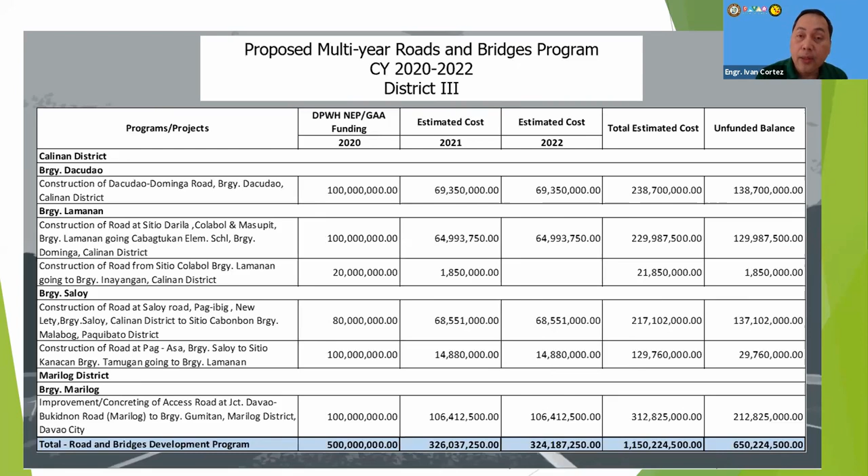We get grants from national government agencies, and shown on screen is a sample of multi-year coordinative funding engagement with DPWH for our roads and bridges program. The one on screen is for District 3, totaling over 1.1 billion pesos, mostly found in the barangays of Calinan and Marilog District, Lamanan also, and Saloy.

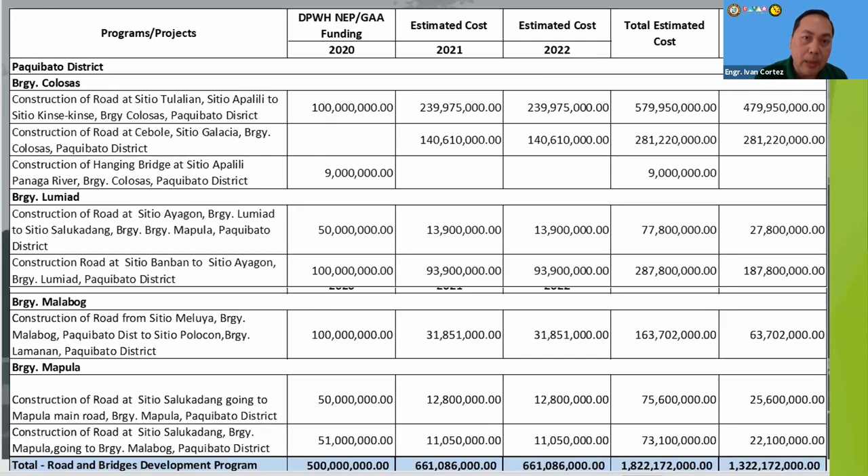For District 2, these are some of the projects also under the multi-year roads and bridges program. So if you're looking at the screen, you will find that 2020 was already taken up with DPWH under the GAA, or General Appropriations Act, and NEP. And if you're also wondering how we prioritize projects, these documents are the sources of projects. We have mandated plans.

Mandated plans for other initiatives include studies conducted with JICA and other agencies such as ADB. For the mandated projects, we have the Comprehensive Development Plan, updated for 2019 to 2022, and the Comprehensive Land Use Plan for 2014 to 2022. The proposed amendments for 2021 to 2028 are now scheduled for second reading at the City Council, so we're waiting for their advice on when that will be. We've conducted a series of committee hearings on the amendments to the CLUP, the Land Use Plan, or the Zoning Ordinance, since October last year.

Up to this year, we have the Executive Legislative Agenda. This is when newly elected councilors convene with the mayor and vice mayor to plot the priority projects for the city. The executive legislative agenda is also part of the listing of projects, where we take a look at how to prioritize those listed.

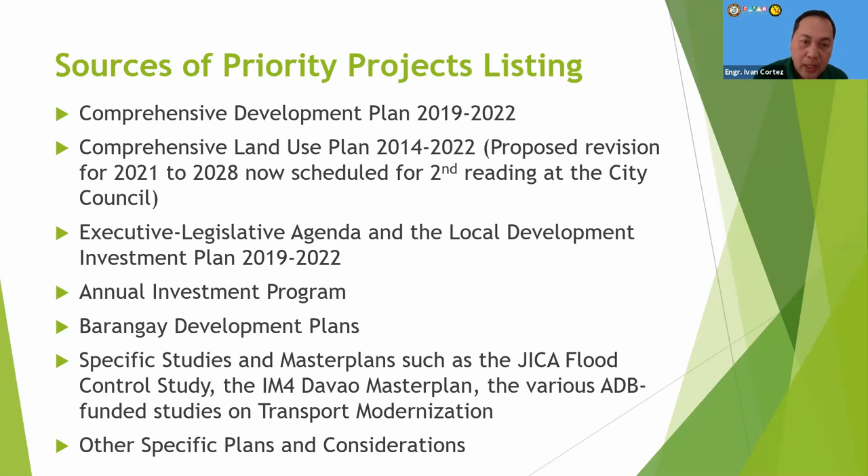We also have the Annual Investment Program, the barangay development plans, and specific studies and master plans such as the JICA flood control study, the IM4Davao or Infrastructure Modernization for Davao project, and ADB-funded studies on transport modernization. For other specific plans and considerations, we have the road network development roadmap, traffic management plan, mobility plan, urban services development plan, economy and industry concerns, and social and environmental considerations.

Some of these plans are also incorporated into our comprehensive development plan.

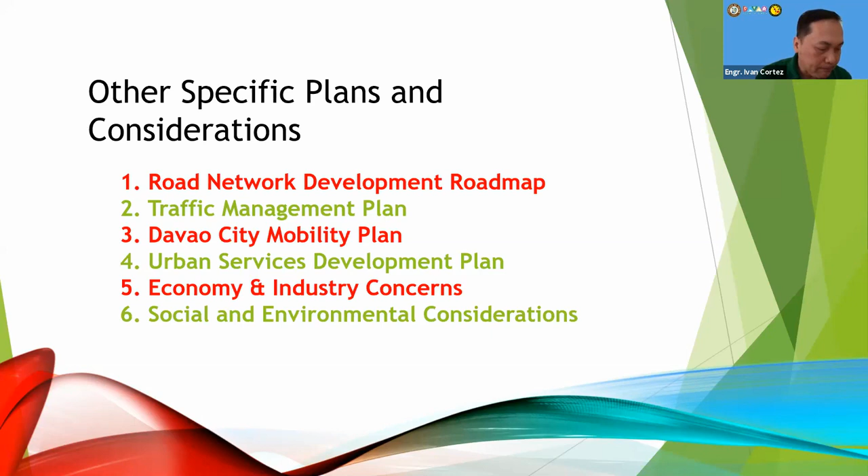On screen are some of the projects being undertaken by the national government for the benefit of the people of Davao. I will not expound on them as they will be presented by the concerned agencies. These are the Coastal Road Bypass Construction Project and the most famous Samal Island-Davao City Connector Bridge.

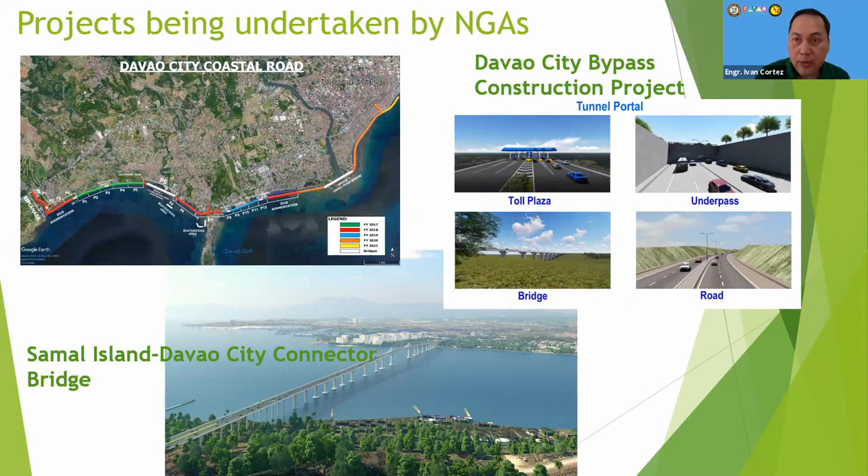Also in the pipeline is the Davao City Expressway project. This has three sections: the Ma-a interchange, the Panacan interchange, and the interchange that will connect Ma-a to Dumoy.

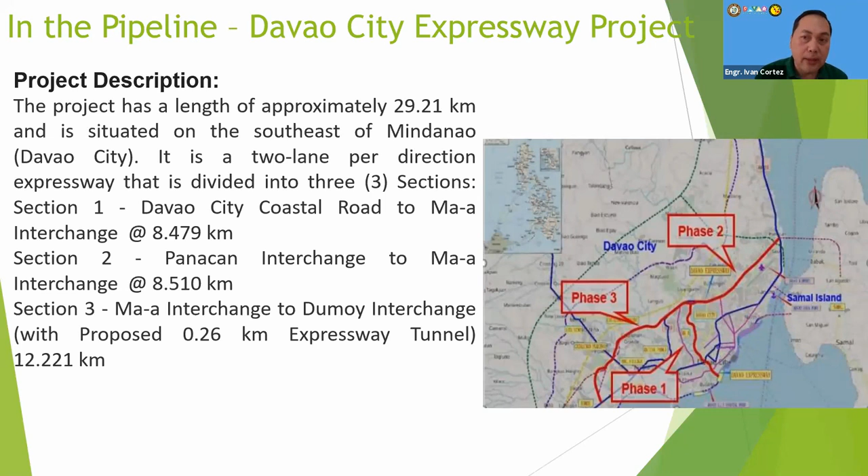Our guiding plan for infrastructure projects is the IM4Davao, as mentioned earlier. This study provided a listing of infrastructure projects which Davao City may implement for completion up to 2045. It recommended improvements in the road network, mobility, traffic, and urban services development.

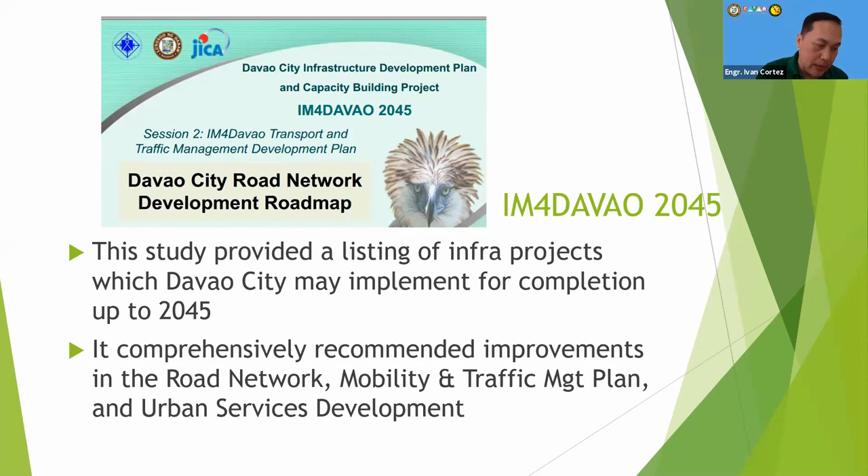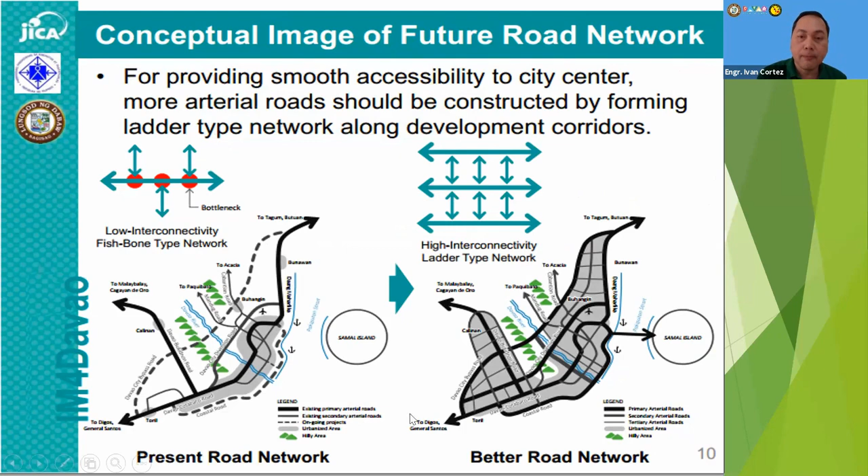To give you a glimpse of what's inside the IM4Davao, on screen is the conceptual image of our future road network. You'll find on the left side of the screen the present road network, and we're planning to have a better road network with parallel roads. One of those is the bypass construction project, along with lateral roads crossing each other.

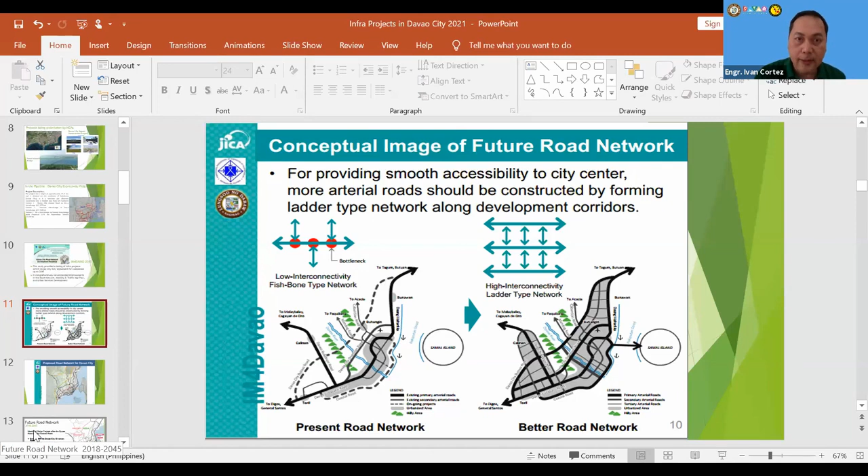Our road network will ensure connectivity, redundancy, and accessibility are enhanced for better productivity and efficiency.

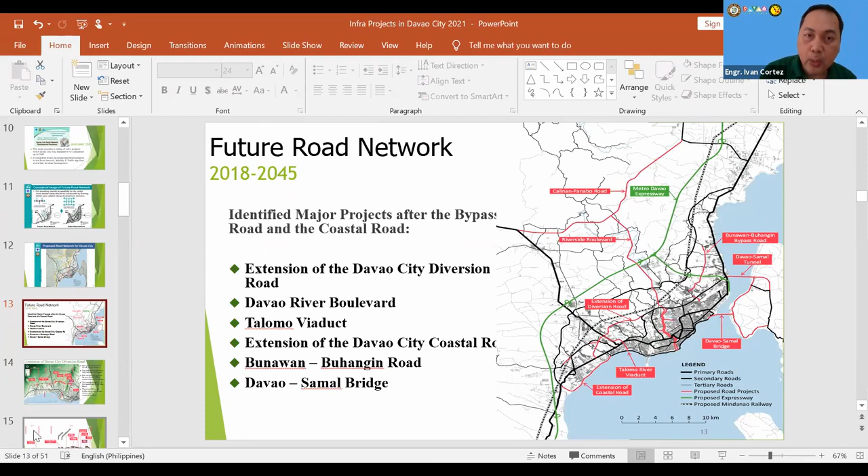Some of the major projects identified in the IM4 are the following: the extension of the Davao City Diversion Road, the Davao River Boulevard, the Talomo Viaduct, the extension of the Davao City Coastal Road, the Bunawan-Buhangin Road, and the Samal Bridge. These are all included in the 2018 to 2045 IM4Davao study.

This is an illustration of the extension of the Davao City Diversion Road. As you can see, if you're using the Davao Diversion Road, you'll still have to pass through Bangkal — that's where the choke point comes in. To solve that problem, you won't have to go all the way down from the diversion to Bangkal just to meet the traffic there. This is the solution provided in that study.

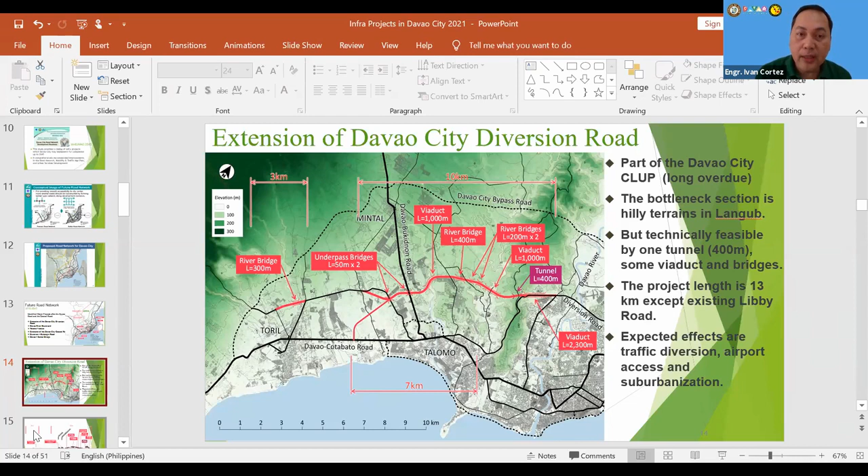In that study, you'll find an illustration of the bridges needed to connect all these road projects and provide the extension for the Davao Diversion Road. This will also require a tunnel, a 400-meter tunnel.

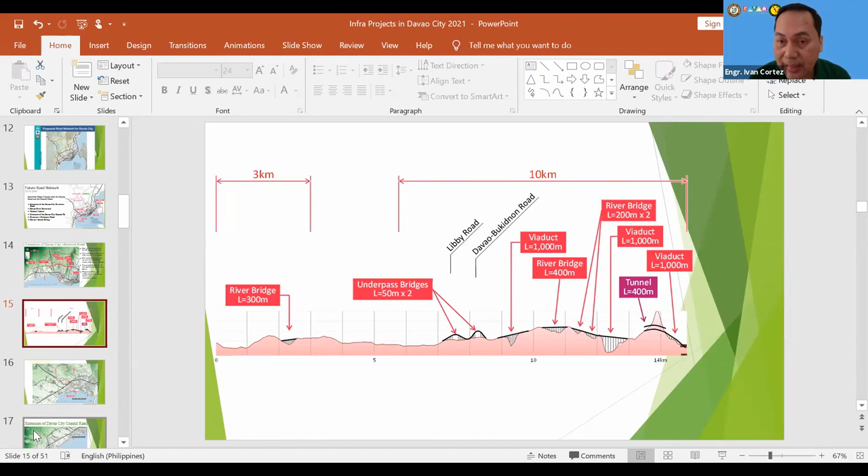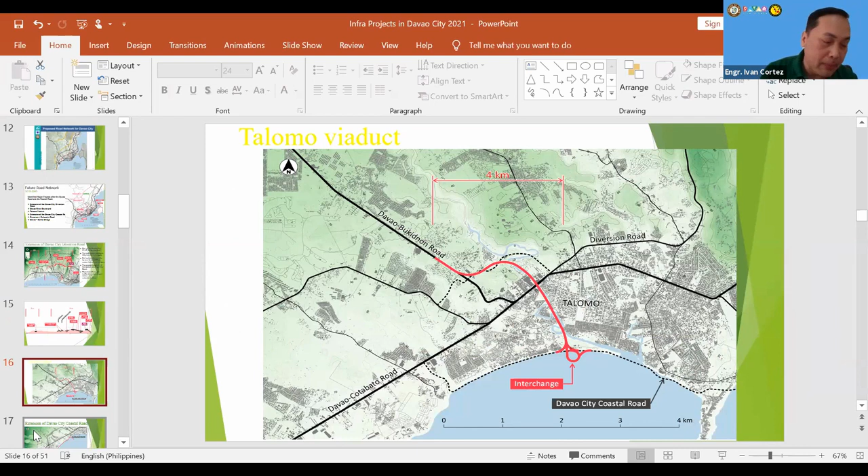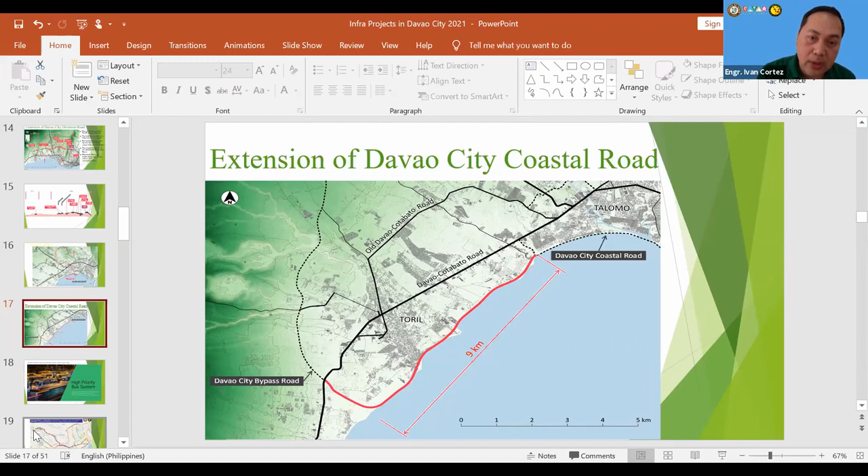The Talomo Viaduct is seen to decongest the Davao, Bukidnon, Ulas intersection. This is also in the pipeline already. And then the extension of the Davao City Coastal Road is also in the pipeline. This will connect the coastal road to the bypass road. The extension is in red line, and the dotted line is the Davao City bypass road. So from Bago Gallera all the way to the Toril coast, and then all the way to the bypass road.

We are in the thick of things in finalizing the land acquisition activities of bus depots, bus terminals, and bus stops for a high priority bus system, which will have 1,000 buses replacing the 7,000 plus PUJs in the city. This is in coordination with the Department of Transportation, who are funding the project.

In preparation for the HPBS, or the High Priority Bus System, the City Government of Davao is already implementing the DIBS, or the Davao Interim Bus Service. In the first quarter of 2021, we have already provided bus services for Catalunan Grande and the Diversion Road route, and the mayor launched these routes just recently.

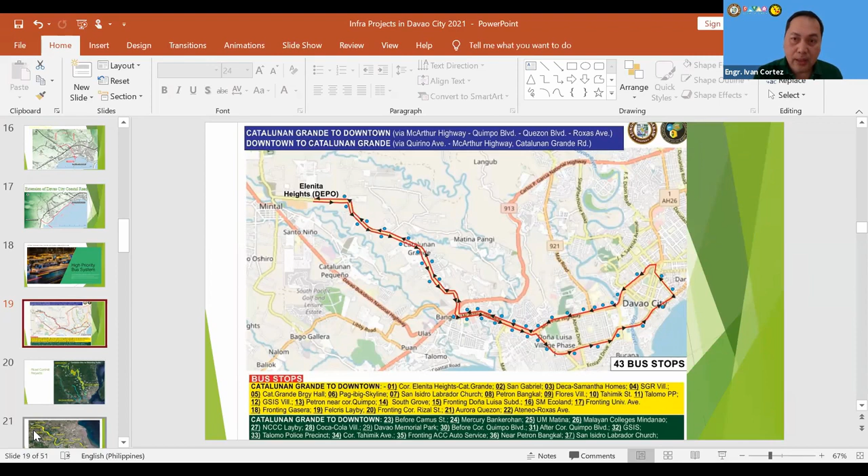We also continue to address flooding concerns. The biggest flood control project that we will schedule for implementation is contained in the IM4 Davao study, which the study also was taken up after. JICA also commissioned another group of consultants to take up the flood control and riverine projects, involving Davao River, Talomo, and Matina River. In that study report of JICA, they have already suggested the strategies as well as the listing of projects that must be undertaken in order to address the flooding concerns in the downtown area.

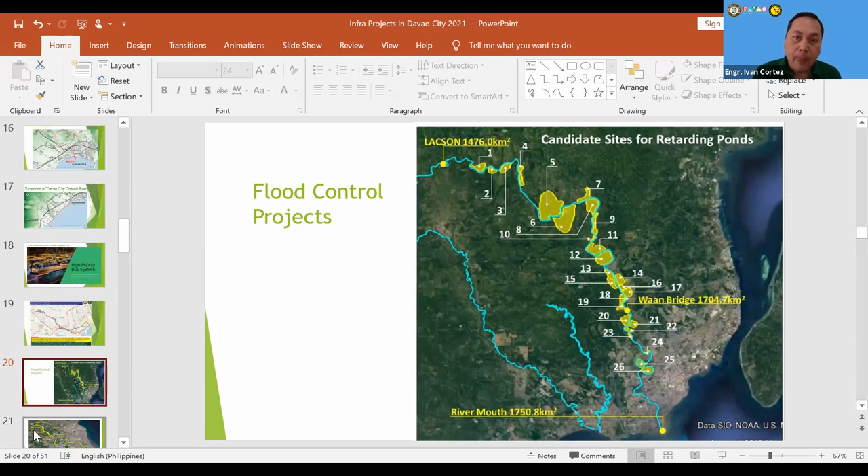Another illustration on screen as a result of the study is the widening and cut-off of the Davao River. The actual size of the Davao River is illustrated on screen by the green line, that snake-like pattern. You will see the yellow line indicating the proposed river flood control project, which will cut off two bends of the river along Maa, instead of continuing with the snake-like pattern. They will somehow straighten the river, and the spaces that will be provided by those cut-off lines of the river will be utilized for the relocation of those that will be affected by the project.

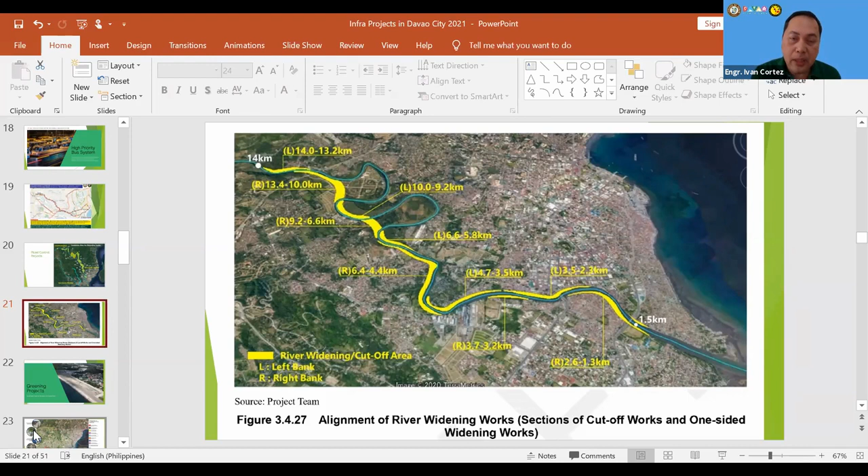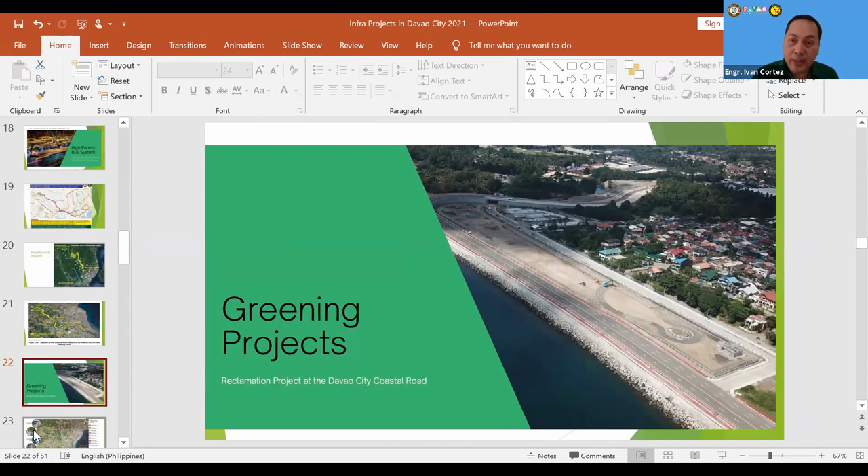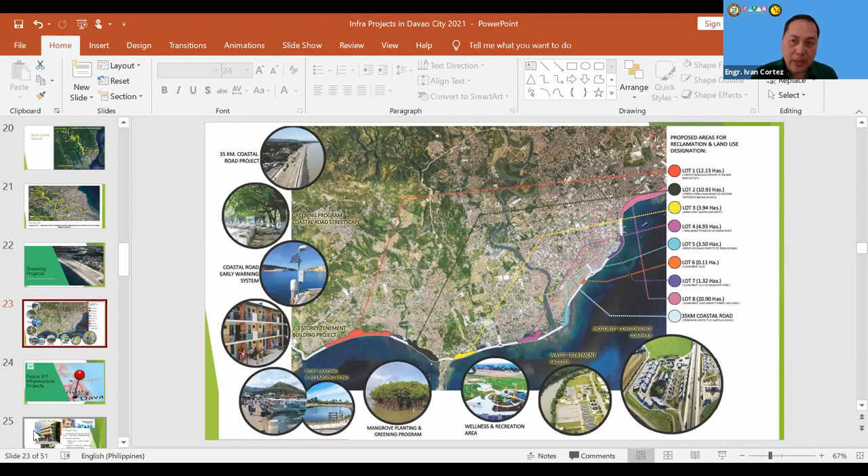So again, the spaces that will be created because of the reclamation project, which is the coastal road, our technical people at the city have come up with this scheme for those spaces, which might include tenement housing, early warning device system, wellness and recreation area, wastewater treatment facility, and underground flood control projects, because basically the coastal road created a fence, no, and obstructed somehow the flow of storm water from draining to the sea. But overall, the areas will be largely for greening purposes, as instructed by the mayor. So those areas that were created by the coastal road will really be largely for greening purposes.

Earlier, you've also seen multi-million road projects for the rural areas in districts 2 and 3, for Marilog and Paquibato, but be informed that we have the Peace 911 infrastructure projects. This will allow our fellow Davaoenos in these areas better access to services and facilities, as well as improve their living conditions. When we ask them what infra projects they need, on top of the list are roads, water system, buildings for health centers and schools.

If you will notice, these are areas which are not yet being served by the Davao City Water District. So when these barangays were given the 20 million funding from the national government through ELCAC, the local communist armed conflict project, most of the projects submitted were on roads and water system, as well as school buildings and health centers.

Talking about buildings as part of the infrastructure menu of projects, allow me to show you some of the buildings being constructed in the city, which are aimed to pave the way for better public services.

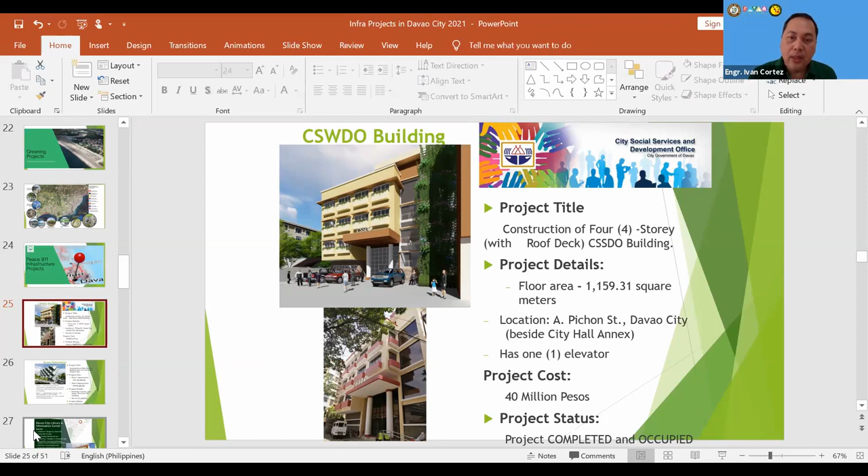On screen is the CSWDO, or the City Social Services and Development Office Building. This project is already inaugurated. They had a blessing here. It is a 40 million project.

And then you have the Museo Dabawenyo. The library project for Davao is a 4-story project wherein the higher you go up in that space, the more quiet it gets.

I'm talking about the library. For the first floor, you can have group discussions. For the second floor, you have the learning amphitheater. Third floor, you have the formal reading area where it's really very quiet. And for the fourth floor, you have the administrative area and the AVR.

Let me go back to the museo. Museo is a 195 million project, and this will be managed by the national government once open. So this will become part of the itinerary of every Davao visitor once completed.

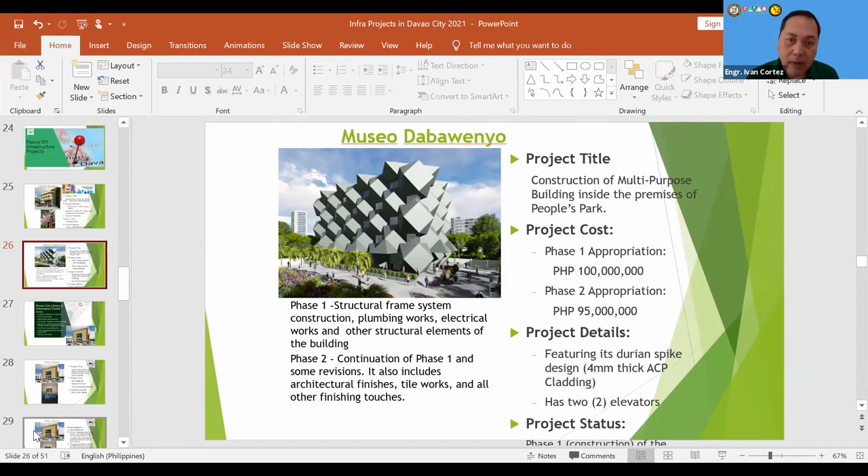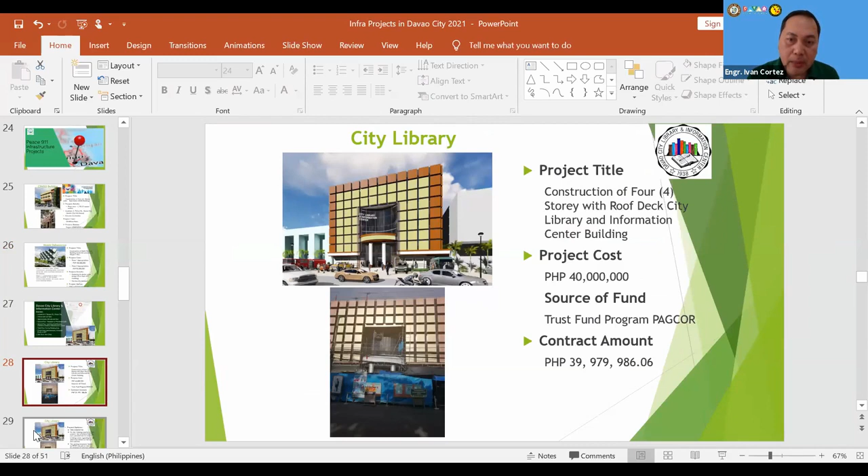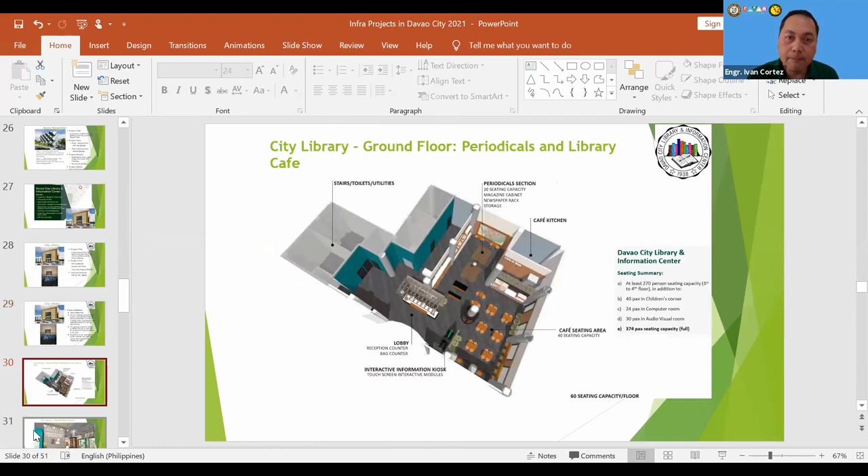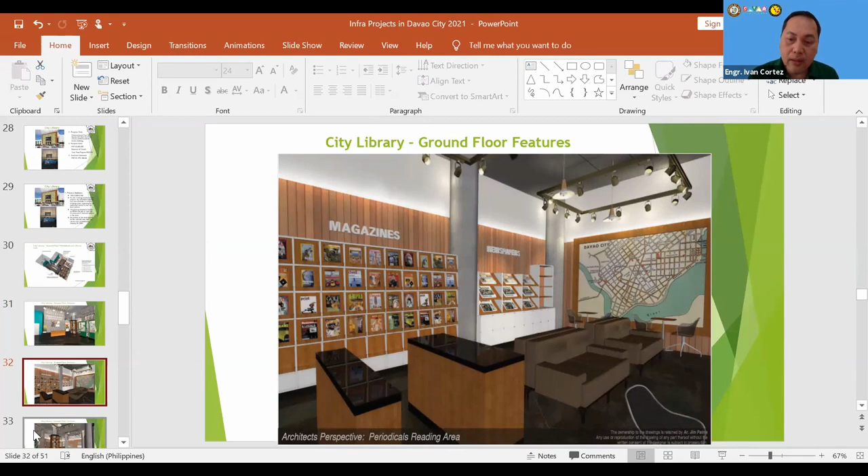Okay, City Library again, 40 million, but the contract amount was 39.9. It's 100% completed in terms of the library structure, but we're still dealing with issues on ISF in the parking area. These are what's inside the City Library. If there was no pandemic, we would have already opened this to the public on a 24-hour basis, so people can have a place where they can do their research and other academic pursuits.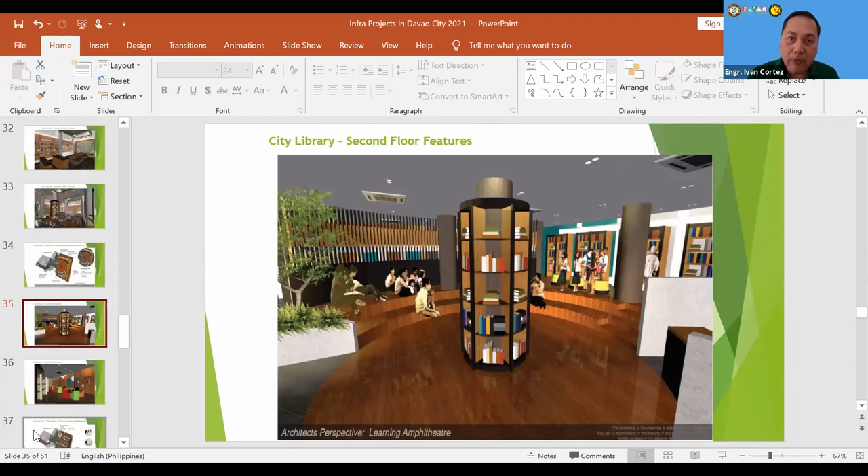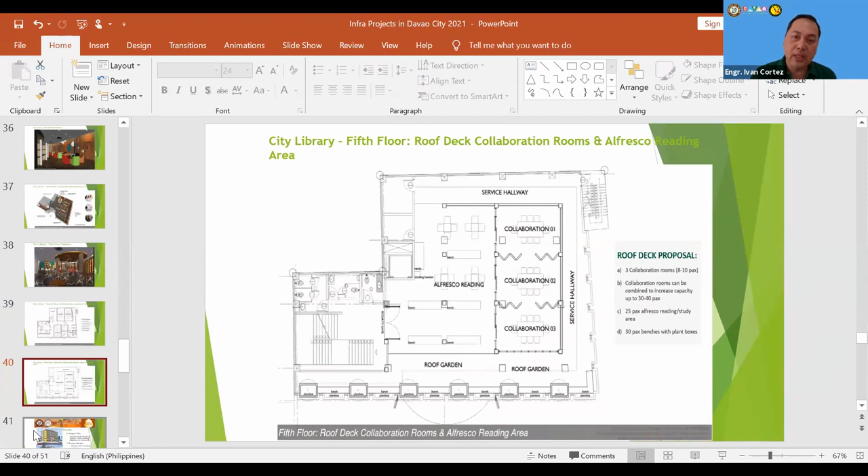Ground floor, that's the second floor of the area. Second floor features, and we have the third floor. This is how it will look like. Fourth floor, administrative building. Fifth floor is the roof deck. These are some of the suggestions for the utilization of the area.

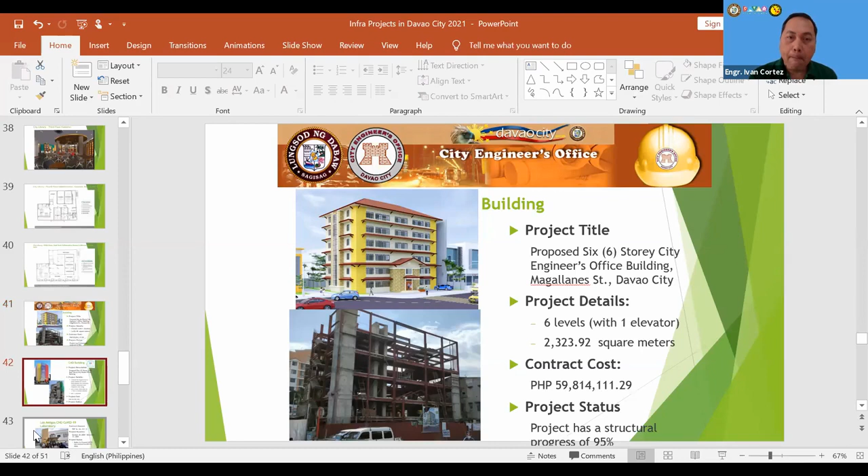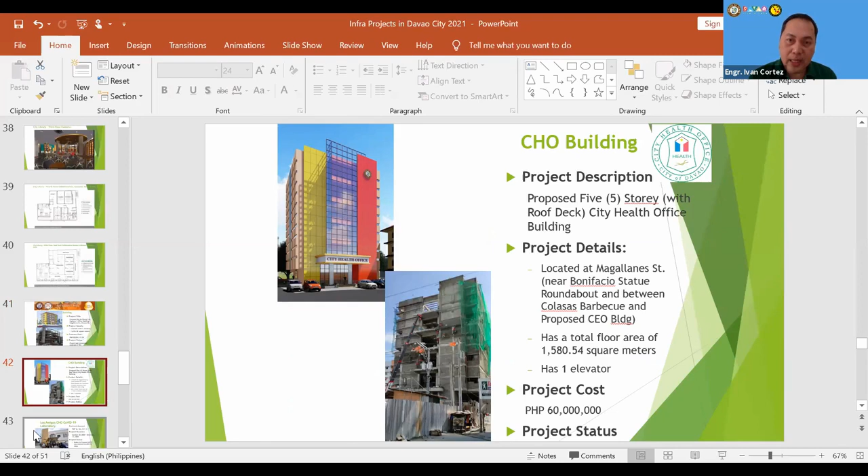Another building is the City Engineer's Office. The contract cost is 60 million, but there's an additional allocation of 80, so it's already about 140 million. And then you have the City Health Office building at 60 million pesos. You will find this near the Bonifacio Monument. This City Health Office building is just beside the earlier shown City Engineer's Office, so they're adjacent to each other.

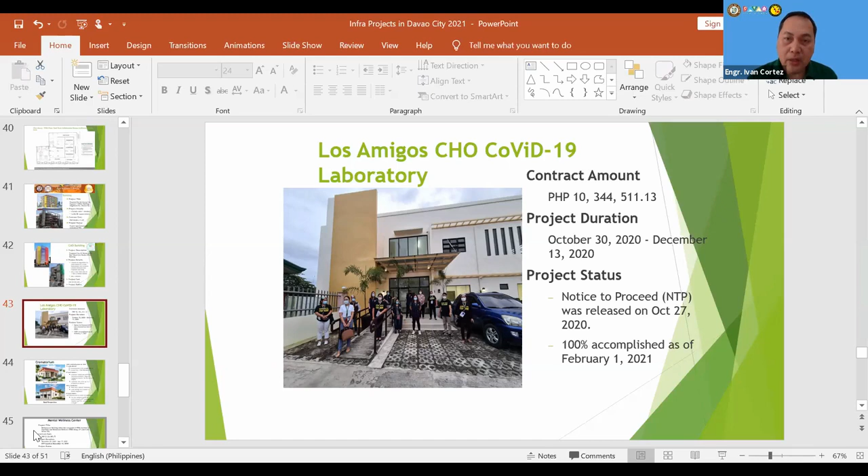We have just completed the Los Amigos CHO COVID-19 laboratory, a project cost of 10,344,000. And then the crematorium, this is also operational already. We have the mental wellness center, where the notice to proceed was issued last December. The project is ongoing and has a progress of 1% as of January 2021.

And then the Davao City Special Needs Intervention Center, project cost of 4.5 million, is in ALS People's Park, Pelayo corner Palma Gil Street.

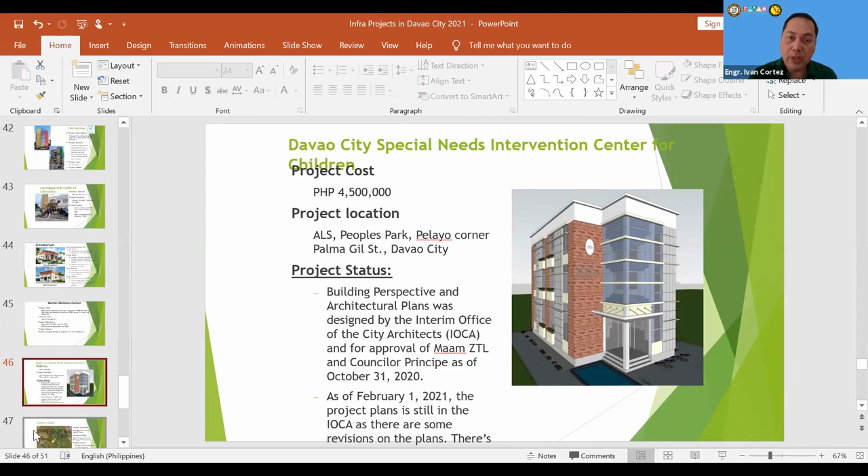On the landfill, we need to have another landfill in the city, and we're targeting the areas beside the current one to serve the purpose. Instead of scattering landfills all over the city, we decided it's wise to have the next landfill near the current one, so we won't scatter the not-so-pleasant amenities of a landfill.

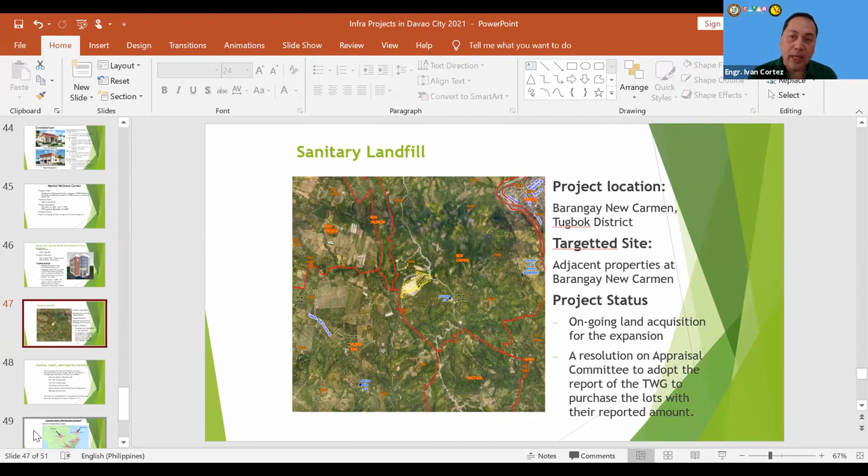Also in our plan and pipeline are the Central, South, and Mid-East bus terminals. We're correcting the notion that Bunawan is the north of Davao, because if you look closely at the entire map of Davao City, Bunawan is really in the Mid-East portion. If you're referring to the northern part of Davao, you're referring to Marilog and Paquibato, with Marilog in the northwest and Paquibato in the northeast of Davao City.

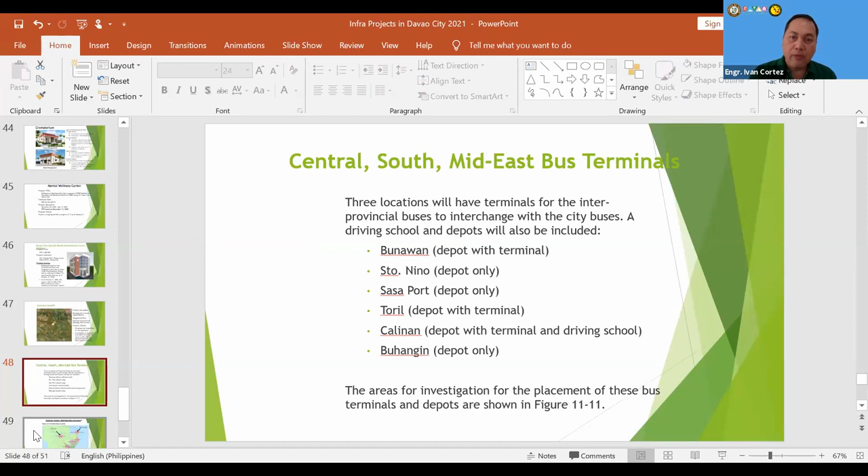So we'll have terminals for provincial buses: the central one near Calinan, south near Toril, and mid-east bus terminal near Bunawan. We've already scouted areas where these terminals will be located. These are the areas being considered for the 3 provincial bus terminals for Davao City.

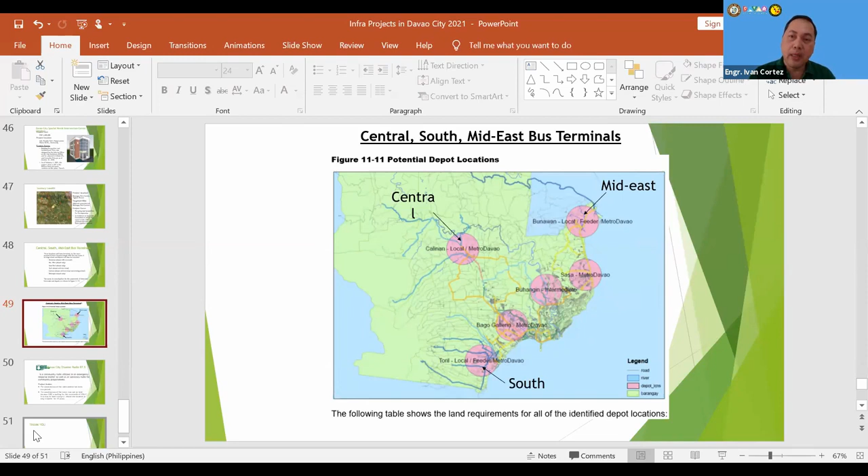The idea there, as I mentioned earlier about the HPBS, is that once commuters reach the provincial terminal, they will switch buses from provincial to HPBS in those provincial terminals that will be established in the city.

I'm mentioning the city disaster radio, not purposely to encourage you to listen to it just because the mayor is always on this channel, 87.5 FM, but also because this relates to my infrastructure topic—we're already allocating funds to construct a city tower for radio, so we can have our own tower for this disaster radio. Thank you very much.

I'm cutting this presentation short. I'll be very glad to join the open forum later.

Thank you very much. Wait, thank you, engineer. You know, the Davaoeños are thanking the heavens that professionally you have migrated from sexuality and family planning to city planning. So we hope you can join us in the open forum as you promised.

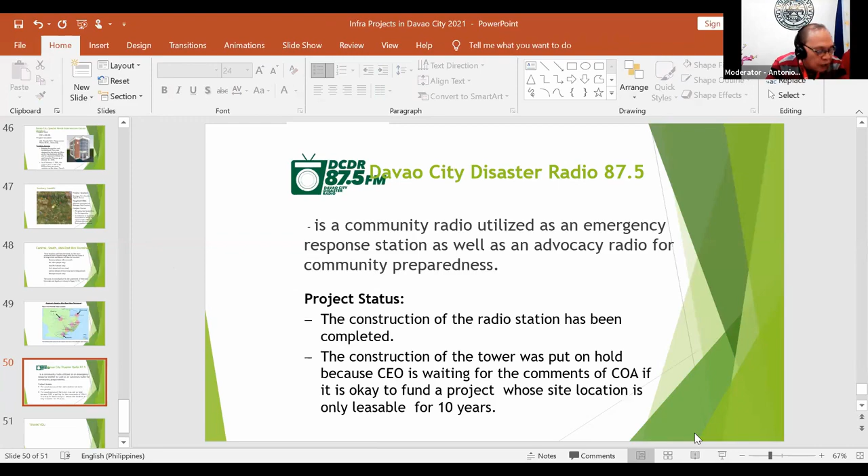Robert Mugabe, the witty Prime Minister of Zimbabwe, has advice for everyone using a towel in the bathroom. He says, treat every part of your towel nicely, because that part that you wipe your butt today will wipe your face tomorrow.

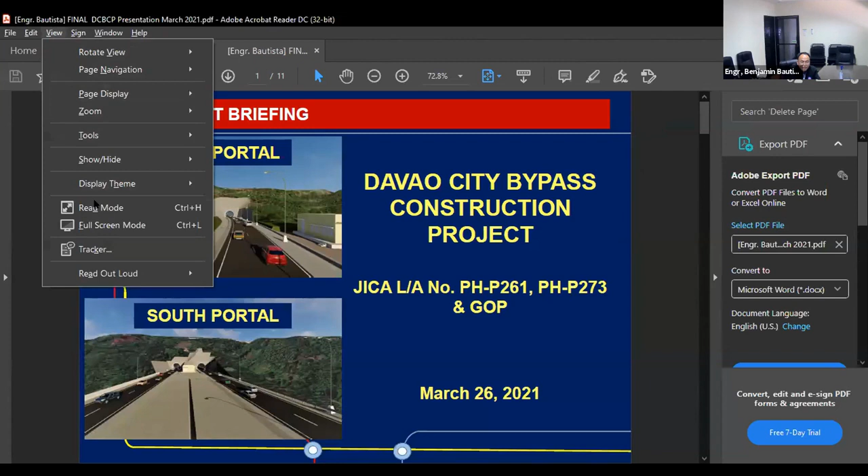Next slide, please. This Davao City Bypass Construction Project starts from the Davao-Digos section of the Pan-Philippine Highway, Barangay Sirawan, south of Toril, Davao City, approximately 500 meters south of Lipadas Bridge. It will proceed in a northeast-west direction towards Barangay Marapangi and Bato, where it will shift slightly northwest upon crossing the Lipadas River.

This is the Davao-Bukidnon Road. It will cross the Talomo River and then proceed in a northwesterly direction towards agricultural land in Barangay Matina, Biao, crossing another waterway, the Matina River, before it proceeds to the tunnel section in Barangay Magtuod.

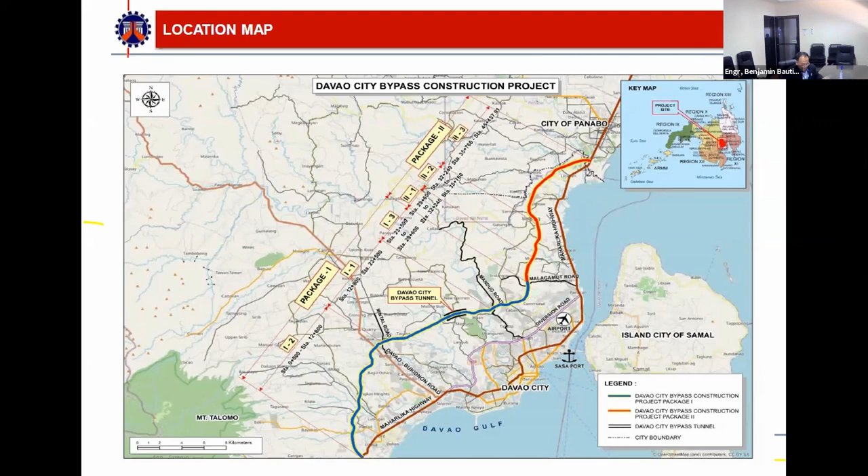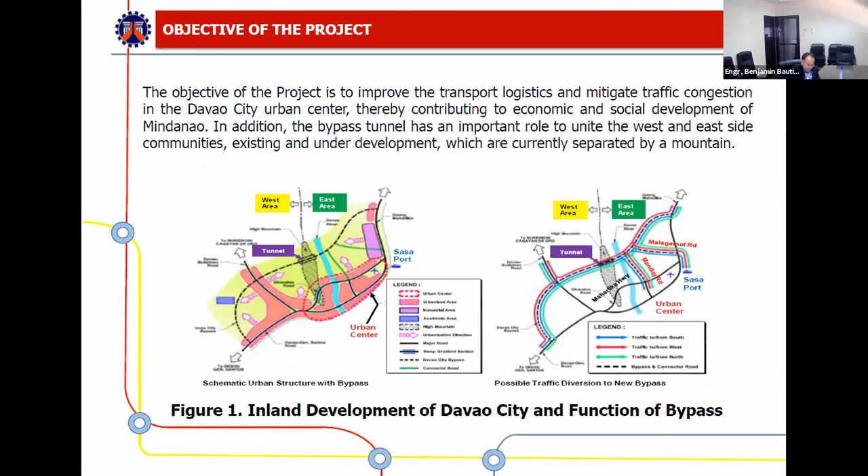This project is to improve transport logistics, as shown earlier by the previous speaker, and mitigate the traffic congestion in the Davao City urban area, thereby contributing to the economic and social development of Mindanao. In addition, this bypass tunnel has an important role in uniting the West and East communities, existing and under development, which are currently separated by a mountain. Next slide.

Originally, this Davao City Bypass project was divided into two packages, but because the cost of this project is very big, we further divided package one into three contract packages: Package 1.1, which is now ongoing, Package 1.2, and 1.3. Package 2 was also subdivided into three contract packages: 2.1, 2.2, and 2.3. As I said earlier, Package 1 started December 21, 2020.

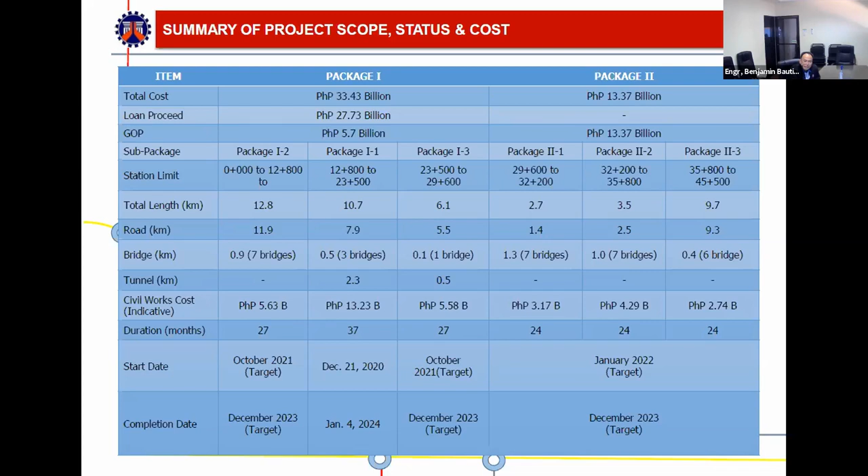For package 1.2 and 1.3, it is now under procurement. And for package 2.1, 2.2, and 2.3, it will be procured by the third quarter this year.

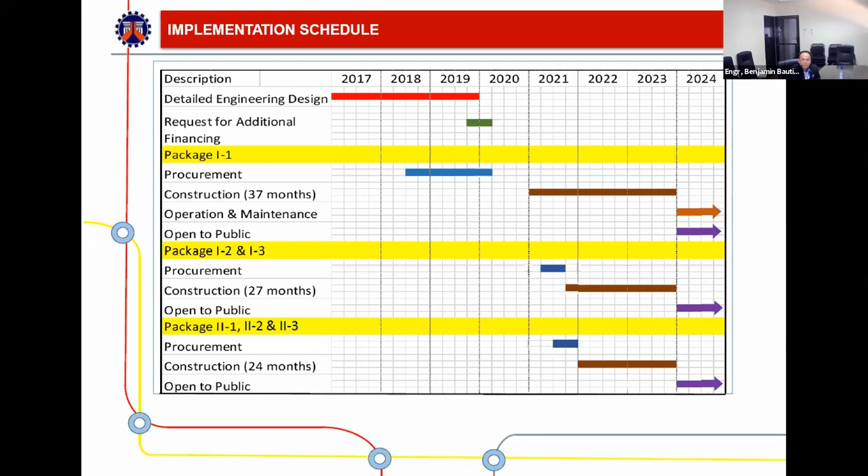For package 1.1, the scope of work is construction of 4 lanes, 2 lanes each direction, with a length of 7.9 kilometers, 3 pairs of bridges length 0.5 kilometer, two underpasses, 2 overpasses, 15 box culverts, 4 at-grade intersections, and 2 tunnels with a length of 2.3 kilometers. It is under contract with the Shimizu, Ulticon, Takenaka joint venture, and the project cost is 13.2 billion, started December 21, 2020, and expected completion is January 4, 2024. As of now, the project schedule status is we have already achieved 0.48% accomplishment.

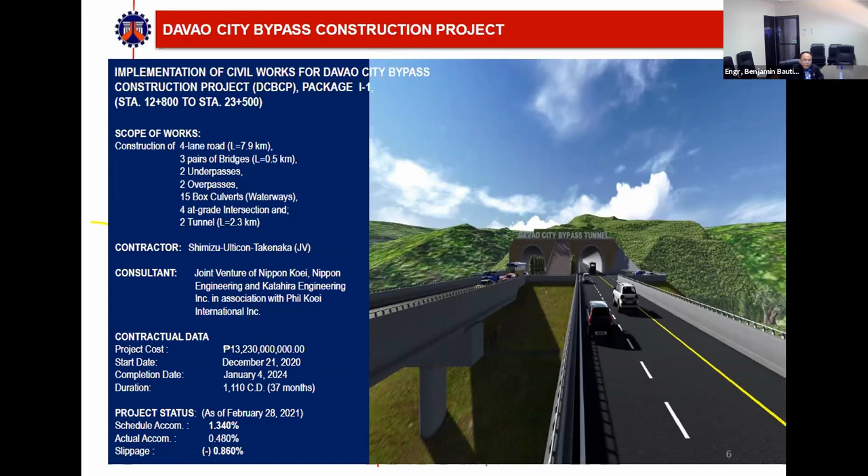Next slide, please. These are the ongoing activities of Package 1-1. We started installing the project signboard and also mobilization of equipment.

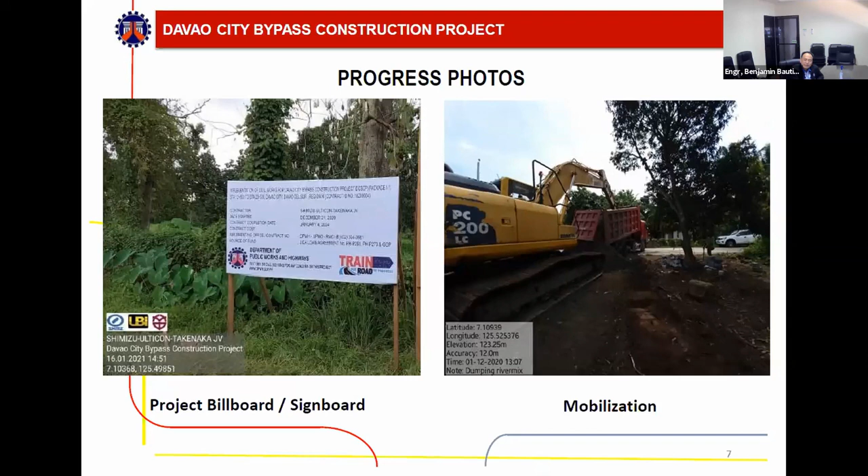We are now on the improvement and construction of the access roads leading to the main alignment, especially the portals of the tunnels, so that the equipment coming from Japan, especially the boring equipment, which according to the contractor is already set for shipment, will be directly transported from the port in Davao to the portals of the proposed tunnel.

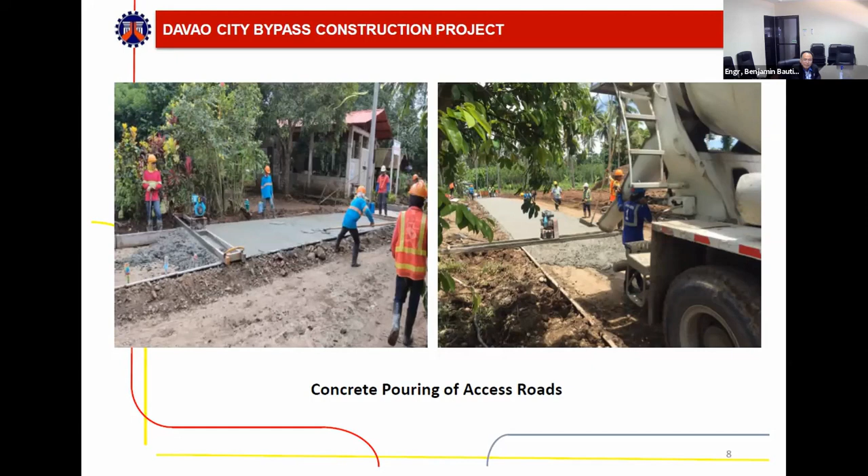With regards to package 1-2, it is also a 4-lane road, 2x2, with a length of 11.9 kilometers, 7 bridges, and 1 underpass along Davao-Bukidnon Road. Package 1-3 is also a construction of a 4-lane road with a length of 5.5 kilometers, 1 bridge, and 2 cut and cover tunnels with a length of 0.5 kilometer.

As of now, the status of these 2 contract packages: the project cost is estimated at 5.63 billion for 1-2 and 5.58 billion for 1-3. The target start of this project is October, or the last quarter of this year, and target completion will be December 2023.

Now we are just waiting for the concurrence of bidding documents from JICA. Once JICA Tokyo concurs with the bidding documents, the procurement will start. Expectedly, the procurement will start by the fourth week of April.

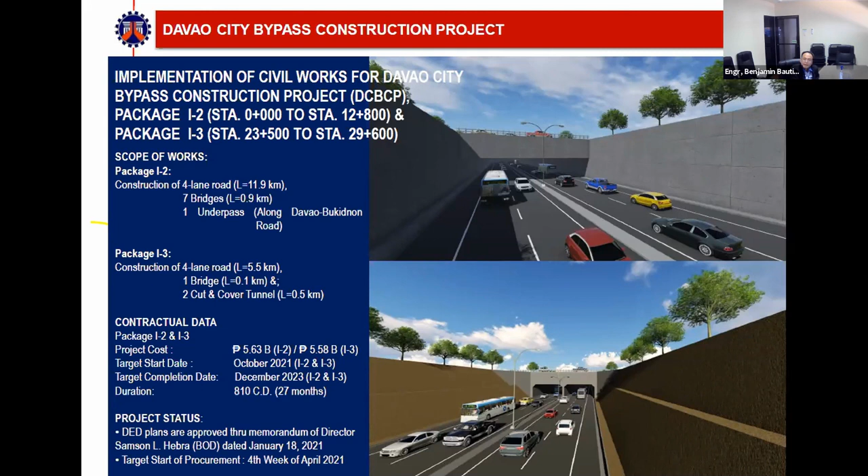With regards to package 2, which was divided into 3 contract packages: package 2-1 is a 4-lane road with a length of 1.4 kilometers and 7 bridges. Package 2-2 is construction of a 2.5 kilometer road, 4 lanes, with 7 bridges, 3 overpasses, and 1 box culvert. Package 2-3 is construction of a 4-lane road, 9.3 kilometers, with 6 bridges, 1 overpass, and 7 box culverts. The respective project costs are 3.17 billion for package 2-1, 4.29 billion for package 2-2, and 2.74 billion for package 2-3.

At present, the detailed engineering design is in progress, and we will start the procurement of these 3 contract packages in the third quarter of this year.

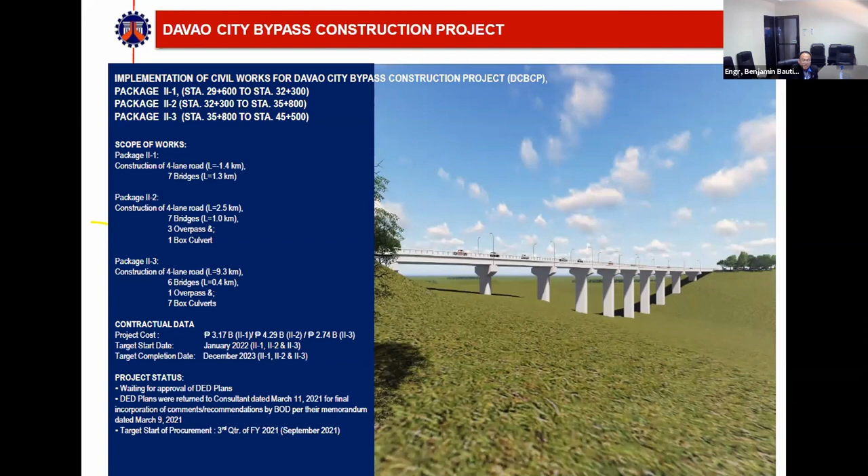So that's all for Road Management Cluster 1, under which we are implementing the JICA-assisted project. Thank you very much, and always be safe.

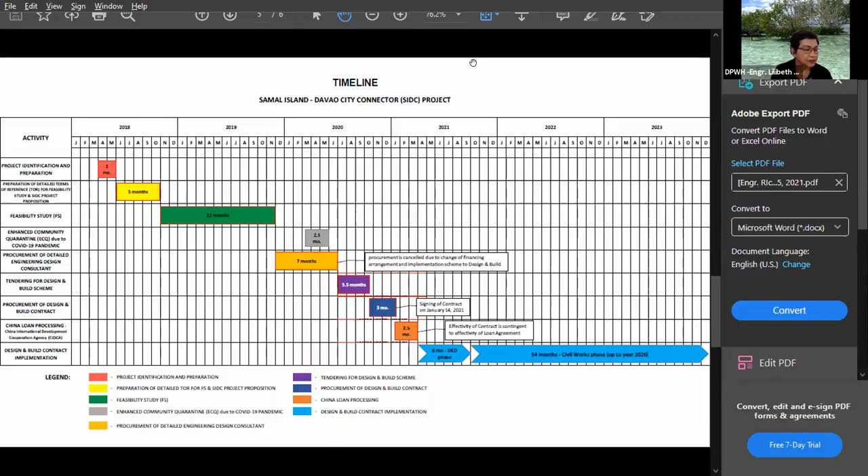To the President of Davao City Chamber of Commerce and Industry Incorporated, Maria Lourdes Monteverde, the members of this chamber, fellow workers in government and in the private sector, a pleasant morning to everyone. On behalf of Secretary Mark A. Villar, we wish to thank the Chamber for inviting the DPWH to share updates on the Samal Island Davao City project. As directed by Undersecretary Emil K. Sadain, I have the honor to present to this body the status and updates of the Samal Island Davao City Connector, or SIDC, project.

May I ask Ms. Anna to share the presentation? I hope I could finish this presentation before I lose my internet connectivity. Thank you. Can you see it now? Okay, I may also check if I'm delivering good audio. Yes, yes. Okay, thank you very much.

If I may begin, the design and build contract of the Samal Island Davao City Connector project will be funded by the Government Concessional Loan Facility under the China International Development Cooperation Agency, or CIDCA. Next slide, please.

The project SIDC is a proposed bridge in the Southern Corridor to connect the Samal Circumferential Road in IGaCoS to Davao City across the Pakiputan Strait, passing over Lisade Street to the junction of R. Castillo and the Daang Maharlika. It has a total length of 3.98 kilometers, including Davao ramps and a roundabout in Samal, with a width of 24 meters and a navigational clearance of 47 meters.

The project cost is 23.04 billion and will be implemented from 2021 to 2026. It aims to provide a resilient and reliable transportation link between Metro Davao and Samal Island, enhancing internal and external linkage to support the growth potential of the Davao region. It would greatly benefit IGaCoS by providing access to tourism activities, enhancing community access to employment, education, and other social services, and serving as an alternative route during emergencies and disasters.

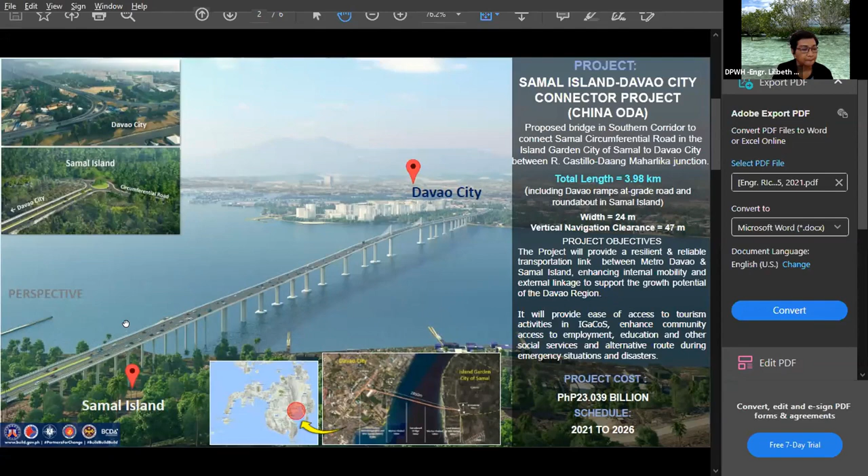This project has been endorsed by several agencies. The Extradosed Bridge in the Southern Corridor was endorsed by the Infrastructure Development Committee on February 26 and approved by the Regional Development Council on March 26, 2019. It was also endorsed by the City Development Council of Davao City Executive Committee, by IGaCoS Council on October 10, 2019, by the Davao del Norte Provincial Development Council on November 14, 2019, and by the Sangguniang Panlungsod, City of Davao, on November 19, 2019.

We also received a resolution from the Office of the Punong Barangay, Barangay Vicente Hizon, on November 21, 2019. The RDC resolution endorsed to the NEDA board, through the Investment Coordination Committee, the approval of the Samal Island Davao City Connector project. Likewise, we received a PAMB resolution giving support or clearance to the SIDC being outside the Samal Island protected landscape and seascape of the expanded National Integrated Protected Area System.

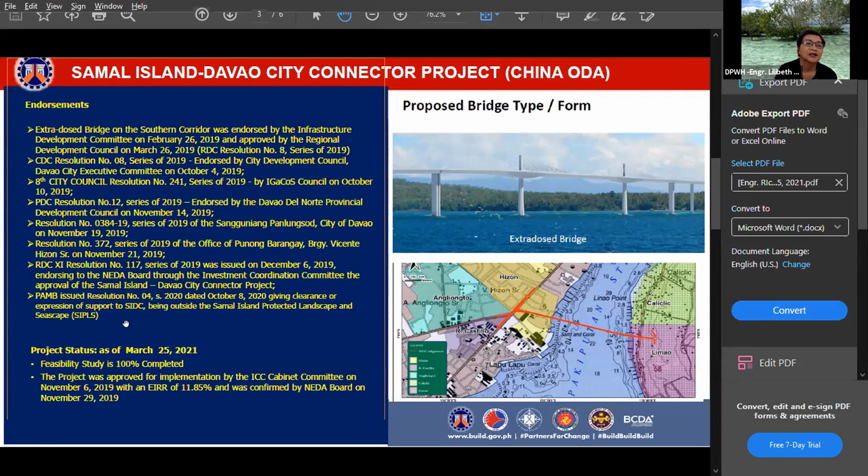On environmental and social safeguard updates, the Environmental Compliance Certificate was already granted by the Environmental Management Bureau of the Department of Environment and Natural Resources on December 17, 2020. The SIDC team has started to mobilize in the project site to coordinate with the LGU and DPWH regional and district offices and other stakeholders on the formulation of the City Resettlement Implementation Committee, intended for the smooth implementation of right-of-way acquisition.

For the design and build scheme, the procurement of the design and build contract was carried out from October 2020 to December 2020, with the notice of award issued on December 14, 2020, and confirmed on December 16, 2020 by the winning bidder, China Road and Bridge Corporation.

The signing of the design and build contract agreement was conducted on January 14, 2021, and DPWH submitted the signed contract agreement to DOF the following day to kick off the loan negotiation process, under the China ODA protocol. We first conducted the procurement before starting the loan negotiation.